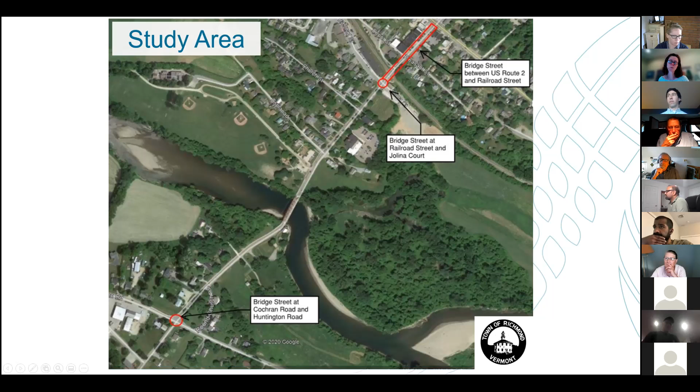One of the things we got into at the local concerns meeting was to really think about what the purpose and need for this project was. I'm not going to read it, but really it has to do with creating a multimodal corridor here to better accommodate pedestrians and bicyclists. There were a few different needs identified regarding mobility and safety, but also with an eye towards maintaining parking to support businesses as an important piece of the needs of this project as we evaluate all our alternatives.

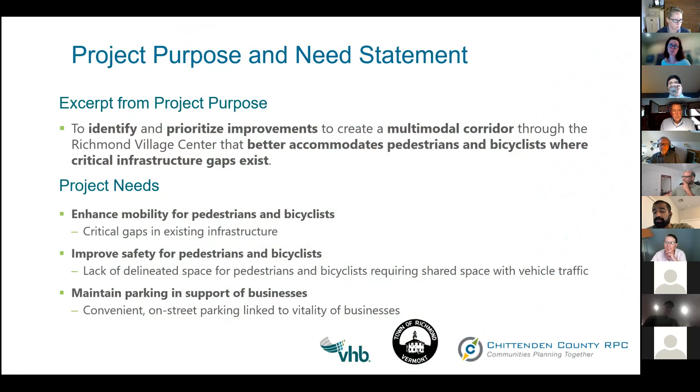Karen can jump right into presenting some of the alternatives. Sorry, I'm getting a little accustomed to this new setup here, so forgive me.

All right, so we came up with a couple of different alternatives for this section of the corridor along Bridge Street. This first one, we're jumping right in.

What you're seeing on the screen in dark highlighted lines is new sidewalk. So that's a new 5-foot sidewalk on both the west and east side of Bridge Street, the west side through that section along the front of the Richmond Market, and on the east side, basically from Jolina Court all the way to where the current sidewalk ends on that east side, up at that mid-block crossing in front of the commercial block.

So new 5-foot sidewalk, and really the differentiator in this alternative compared to the others is that we're trying to accommodate that 5-foot sidewalk basically to where the edge of pavement exists today. So in terms of impacts beyond where that pavement is today, it's really minimal. But with that, the trade-off is a shared lane condition for the bicyclists. So even though we're limiting that impact beyond the edge of current pavement, and getting those sidewalks in, we're in a shared lane condition for those cyclists.

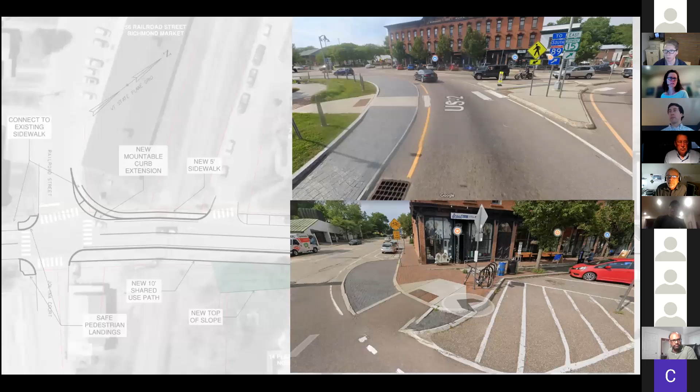All right, Karen, did we have an image to show about that mountable corner next in our slideshow? Yep, let's show some of that so folks understand what we're talking about here.

In both of these images, you can see on the corner a slightly mountable extension that would provide a car with guidance to drive around it, but a truck driver swinging a little wider would go over it. We know on Railroad Street they get large trucks in and out, so we wanted to make sure we're still accommodating those movements, but in a way that generally slows traffic down. That's what you see faintly to the left on Karen's screen - that mountable curb extension.

Jen, you may have said this earlier when Alan was asking about mixing and matching and you were answering, but I was taking notes at the same time, so apologies. Is the additional crosswalk shown as part of alternative 3 at this intersection only enabled with the tightened curb?

We could provide it in either case, but it's a little better with the tightened curb because it shortens the pedestrian crossing distance and provides traffic calming - it makes a driver feel the curbs are closer and that they should drive a little slower. So we can certainly entertain it in either case. If someone has feedback on that, I'd be happy to hear it.

Just the more significant versus moderate. Sure, and the biggest piece there is that there are some drainage structures on the east side of the corridor. With the bike lane, we may need to do some relocation of those structures. But the impact would definitely be less because those curb lines are actually further out than the other two options. Those curb lines are pretty squeezed in, close to where the existing edge of pavement is today. So we do see a more significant lift for relocating those drainage structures, particularly on the east side, where we're bringing that curb line in pretty far into where the edge of pavement is today.

Kathleen? I did have a question about cost. Would the cost change for alternatives 2 or 3 if, rather than just a slope, you also had a short retaining wall? Or is that included in the cost, or is it just the slope that's included? So with this conceptual cost, we've included that earthwork to do the slope work, thinking through the most impactful of options at that location. But certainly acknowledging your point, it probably would be a bit more expensive to use a retaining wall there, and what materials we'd use for that wall would be a factor. That's definitely something to consider in the discussion of what the right answer is if we're going with option 2 or 3, how we want to mitigate that impact if that's something we're interested in doing, and what the cost implications might be. Thank you.

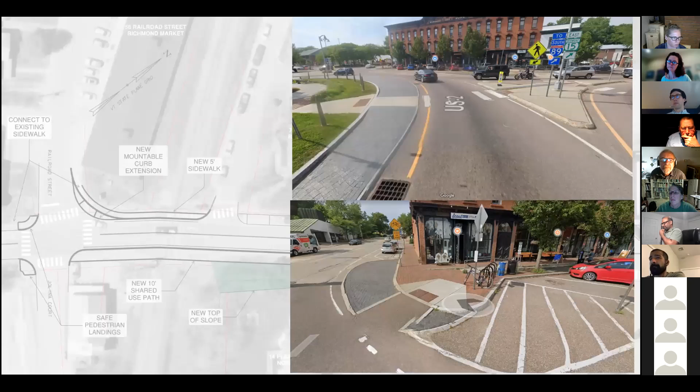I'm not sure I get the difference between 3 and 1. Well, 3 and 1 are at a different intersection. So 3 is down at Railroad, it's the one shown on your screen now. And then 1 is the location up just south of Depot. Yeah, sorry, got it, that makes sense. We've been off that screen for a little bit, so it's a good reminder.

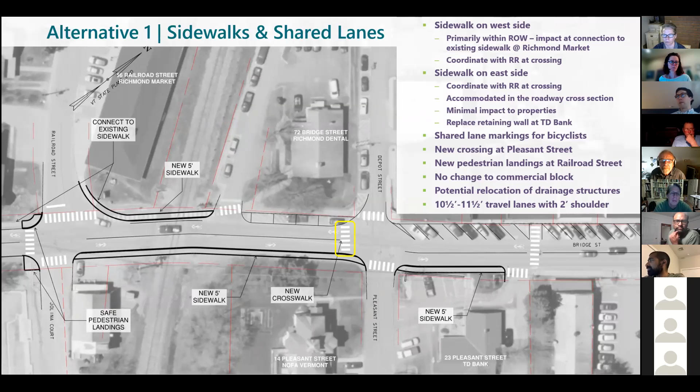So we'll take a few minutes. Again, the first one is shown on your screen currently, the second one is at that same intersection but with the bump out. Karen, you're doing great, as I'm speaking she's switching it to the different crosswalks. And number 3 is down at Railroad and Jolina.

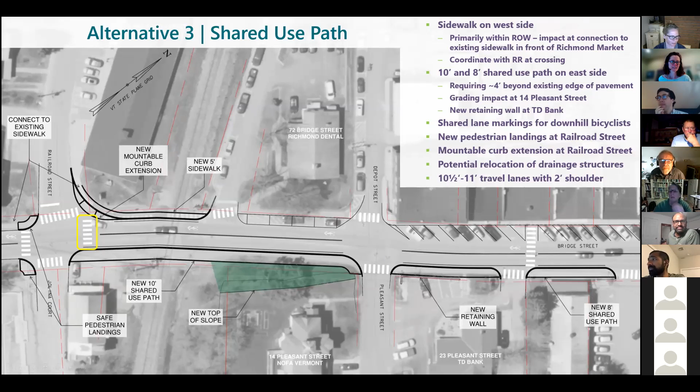Thanks. All right, anyone else want to vote? Well, we still have a second left.

Is there any other input or discussion on this section of the corridor?

And if not, then I would say, Karen, did you want to start talking about our other location? Sure. Hopefully the flyovers of my house are done so that I can actually keep myself on unmute here.

Moving across the river over to the intersection of Bridge Street, Huntington Road, Thompson Road, and Cochran Road, we took a look at the intersection and came up with 3 alternatives that give some consideration to the operations and what's happening out there in the current condition. In all 3 alternatives, we're going to see crosswalks on all 4 legs of the intersection, really trying to round out that pedestrian access.

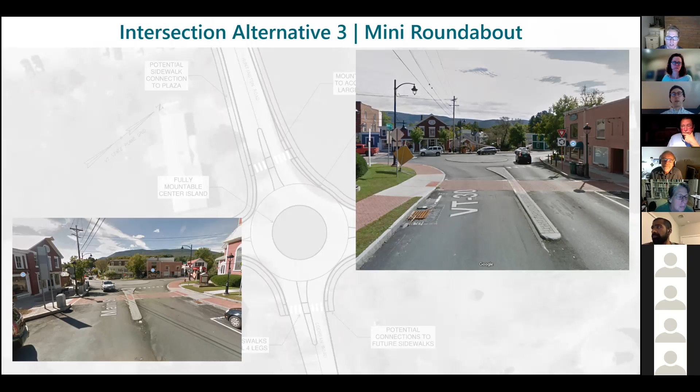Sure, let's forge ahead here. Sorry, I was just jotting down a few notes. All right, so big differentiators on the intersection alternatives when we compare them side by side here.

Obviously the cost of that mini roundabout is an order of magnitude higher than the all-way or two-way stop options. We're considering that we probably would need to do some full depth reconstruction to make sure that roadway is going to hold up and last, and we're not putting a roundabout on top of a roadway that isn't going to be able to take those bigger trucks making those sweeping turns through there. So that's considered in the cost you're seeing, as well as contingencies, engineering and design. Not right of way though - we are not considering right of way in the cost.

In terms of pedestrians, we're really better accommodating pedestrians, providing all 4 legs with a crossing. The one advantage with alternative 3 is that we're creating that median refuge so pedestrians can cross one lane of traffic, have a safe place to wait, and then cross another lane of traffic. But otherwise, really comparable across all 3 alternatives in terms of rounding out that pedestrian access.

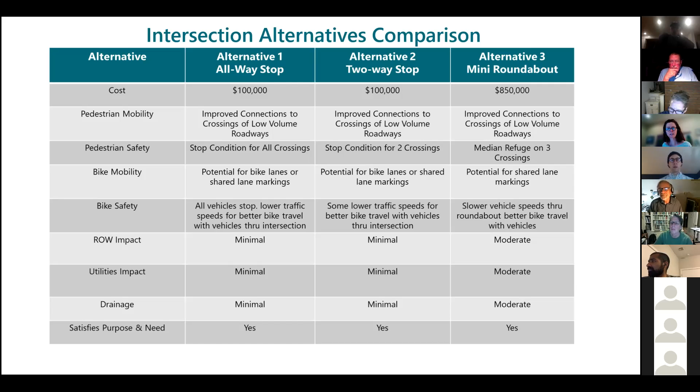Do you want to show that image of the intersection again, Karen? Is that because it's not a 90-degree bend there that you have to have it so wide? It is a little tighter than what is shown in existing, right Karen? It looks like that sidewalk is being provided in what is currently roadway. The intent there was to draw that in a bit. One of the things we struggled with was still accommodating some of those larger vehicles, but we were able to draw it in a bit, so the back of sidewalk is pretty close to the existing edge of pavement. The concept does tighten it up a bit, Gary.

For me, the cost difference makes me lean not to do the rotary. And knowing how some of my friends who drive excavating trucks, hauling excavators and trailers through there constantly, I don't think they're going to like the rotary, even though they can get through it. So for me, I think I'm back to liking the four-way stop the best.

Okay, thank you. Alan? To Ian's point about the setback of the stop line on Huntington Road with the four-way stop, to me the answer is to put a green box for the bicycles out in front, because bicycles certainly don't need to start way back to make the turn like a long truck does. So put us out in front in a green box.

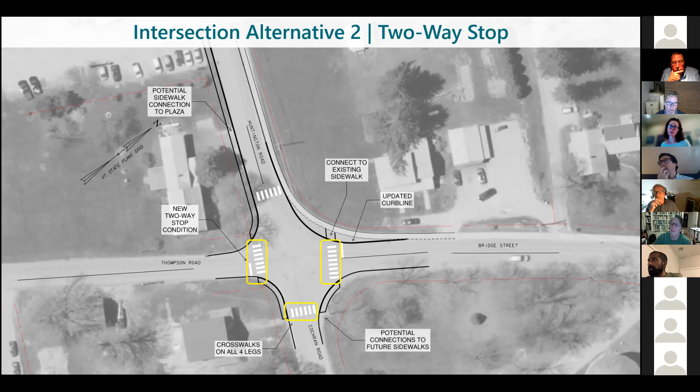There might be a solution where we really look at whether what is shown on Karen's screen right now as an updated curb line - maybe it's similar to what we showed at Railroad. Maybe it's a curb line that's a little more mountable so the truck doesn't need to go as far down Huntington as it swings, and maybe that stop bar could be pulled a little closer.

I'll add on to this - my initial thought when Ian was speaking about that issue was maybe doing a 2-stage left for those cyclists. We could put the green box out of the swept path of those heavy vehicles, then make the crossing as a 2-stage left: make the crossing here, have a little refuge, then make the crossing here. So when you have the right of way, you're able to make that in two stages instead of a single sweeping left turn, which would get you out of the path of any heavy vehicles navigating the intersection. But yeah, we understand how that is a concern, certainly.

Anyone else? Yeah, hey, John here. Hi John, jump in.

I haven't done an official count, but my feeling is there's at least 50 cars, maybe 100, that go through that intersection for every pedestrian, and maybe 40 to 50 for every bicycle. And I think the idea of a 4-way stop would cause some riots, particularly at busy times of day. And it would actually be worse for the environment, I'd say, just because the number of vehicles would have to slow down then speed up again.

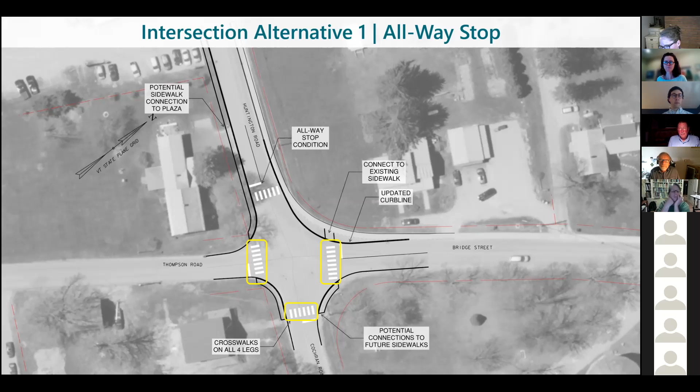Great, thank you. So how are we feeling? Are we ready for a poll? Because we've heard a number of very differing views, so I am very curious to see where we would land.

All right, so for this final location, given your understanding of these alternatives, which would you prefer? Alternative 1 being the all-way stop, alternative 2 being the two-way stop where Bridge and Thompson stop, alternative 3 which is the mini roundabout, or alternative 4 which is no change.